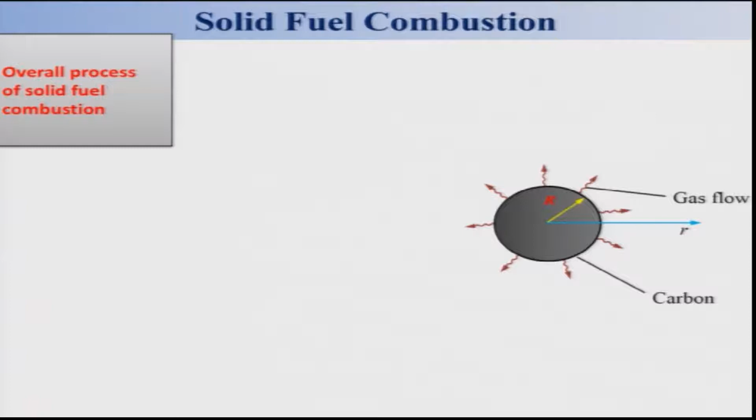And let us now look at a little bit more about it, and recall the overall processes of solid fuel combustion. If you recall, there is a solid fuel, carbon, we are considering. Now, we are considering non-pyrolyzing combustion, where the solid fuel is not undergoing any pyrolysis inside the solid fuel. Whatever is happening is on the surface, and the transport of oxygen is taking place, because this is your ambient. So, therefore, oxygen is getting transported toward the fuel from various regions. We have taken it as a solid carbon sphere, just to make life simpler. And therefore, the oxygen molecule will be transported towards the solid fuel.

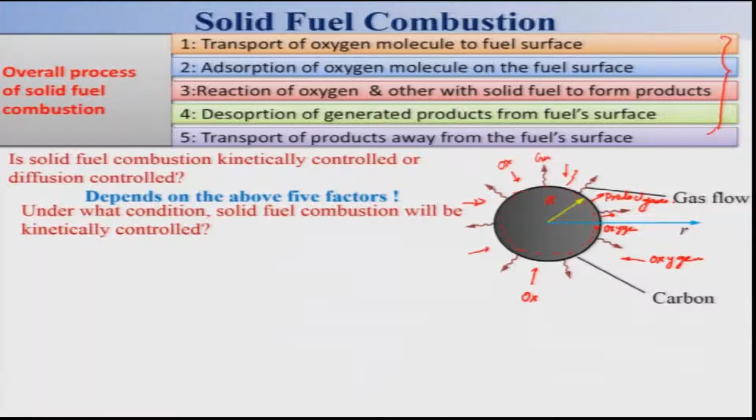But the question is whether solid fuel combustion will be kinetically controlled or diffusion controlled. It depends on the above 5 factors we have discussed, because these are the factors which tell us whether it is kinetically controlled or diffusionally controlled. In other words, solid fuel combustion will be kinetically controlled if the particle size is small and the gaseous flow around the particle is quite feeble, and another condition is that the solid particle temperature should be low. If the particle size is small, that means oxidizer and fuel already have more chance to come in contact, and the flow is really not much.

So, therefore, it is not affecting the solid surface. So, of course, the temperature should be low. So that gradient will not be much, and as a result, the reaction of oxygen and other gases like carbon monoxide with the solid fuel will be much slower as compared to the adsorption of oxygen molecules on the fuel surface and the desorption of generated products from the fuel surface.

That means this is a very fast process. The slower process is your reaction, therefore it is kinetically controlled. And why is it occurring? Because the particle size is small, the velocity around the particle is not much, and the particle temperature is quite small as compared to the other cases where diffusion-controlled combustion will be taking place. So, let us look at under what condition solid fuel combustion will be considered as diffusion controlled.

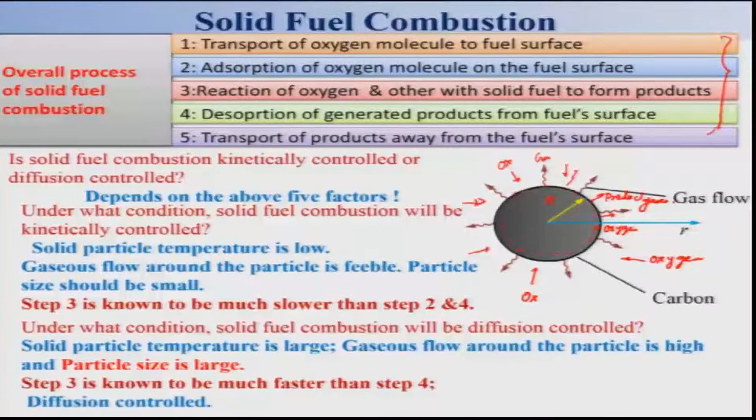So these are basically the slow processes, and they will dictate as compared to the reaction between the solid fuel and the oxygen and other products. So, therefore, under this condition, this kind of combustion is considered as diffusion controlled.

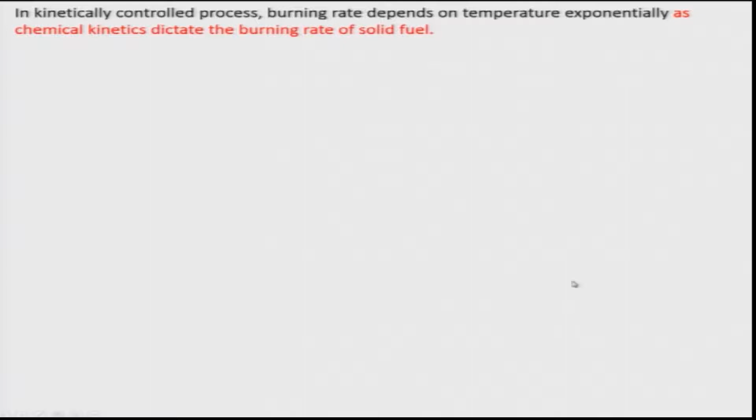So, in a kinetically controlled process, the burning rate depends on temperature exponentially, because the chemical kinetics dictate the burning rate of solid fuel. That is the governing factor controlling the burning of solid fuel, because the time required for chemical kinetics is much larger as compared to the transport of oxygen to the solid fuel.

And if you look, the burning rate changes drastically with temperature change, and this will occur only when the particle size is quite small and there is very little velocity around the particle surface. And keep in mind that in this kinetic control, if you consider this is your solid surface, I can say r/R is equal to 1, and this is your solid surface.

And in this condition, the temperature is a little higher, and it is changing along the radial direction, but the difference between the temperature at the solid surface and at infinity, far away from the surface, is not much. Similarly, the oxygen concentration for kinetic control at the solid surface is a little low as compared to away from the solid surface, but the difference is not much.

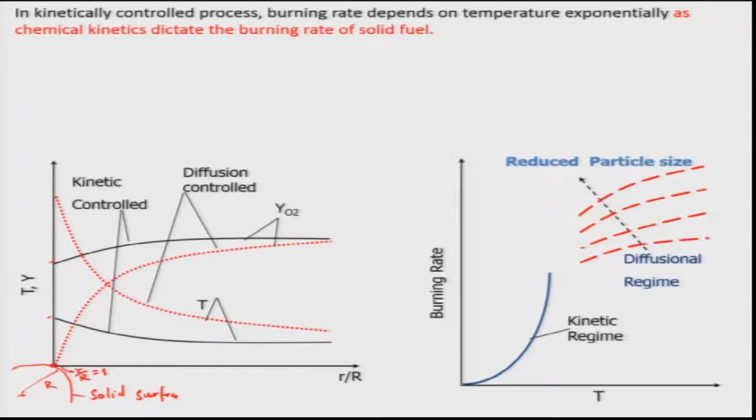In the kinetic regime, the burning rate does not depend on the particle size, because the particles are small and the temperature is not very high. So, therefore, it does not really depend on the particle size; rather, the burning rate depends on temperature exponentially. The diffusion process depends on the particle size and also the flow around it.

You can see that in what I have shown here, the burning rate is changing with respect to temperature, and also as the particle size gets reduced, the burning rate changes, or rather increases. And so, when the particle size is large, the burning rate is controlled by the oxygen diffusion rate to the particles. With the reduction in particle size, the burning rate increases, because more oxygen diffusion will be taking place.

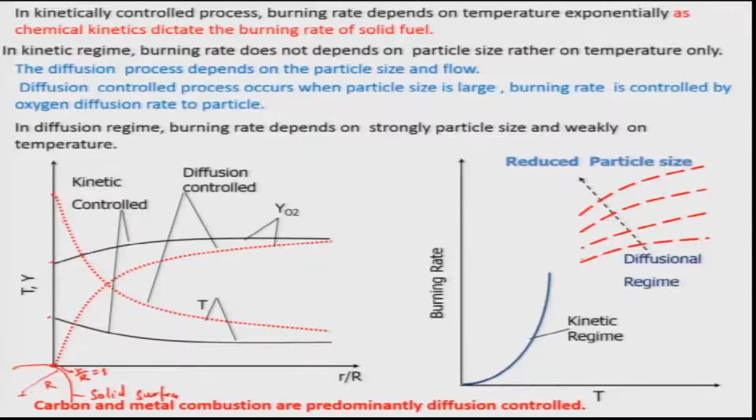So, therefore, you can see there is a drastic difference between kinetic control combustion of solid fuel and diffusion control combustion of solid fuel. Keep in mind that carbon and metal combustion are predominantly diffusion control. Unless the particle size is quite small, then maybe you can get a premix combustion, but which is very unlikely to occur. So, let us look at what really happens considering a particle.

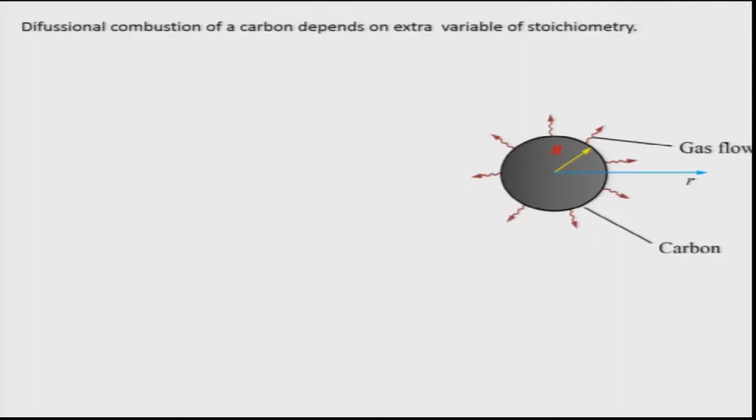Diffusion combustion of carbon depends on an extra variable, stoichiometry. Besides whatever we have discussed till now, there is another variable which plays a very important role, that is the fuel and oxygen ratio. At moderately high temperature, as we have seen, the diffusion control combustion of solid fuel occurs, and oxygen can diffuse to the carbon surface and react to produce carbon dioxide as per the following reaction: 1 mole of carbon reacting with 1 mole of oxygen giving carbon dioxide.

And if you look at the stoichiometry, the fuel oxygen ratio will be 12 by 32 for reaction 1, and as a result, carbon dioxide is formed here, it will be maximum here, and then it will be diffused to the atmosphere. As a result it will be decreasing, and this is r by R equal to 1, which corresponds to the fuel surface at this point.

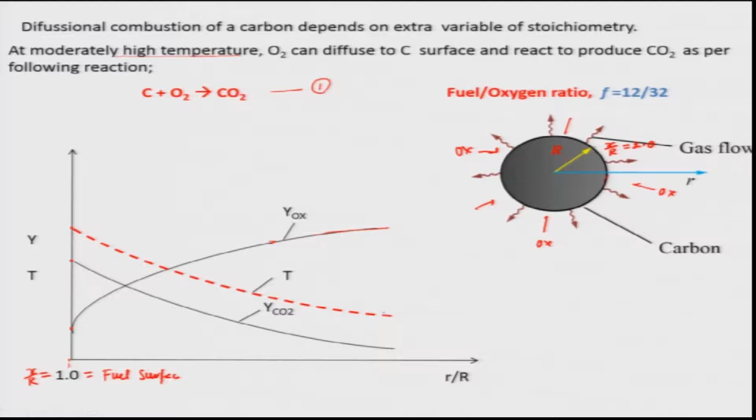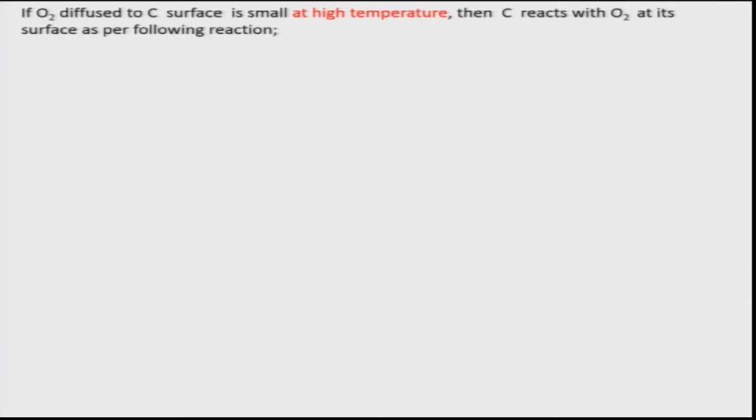So, if the amount of oxygen diffused to the surface is quite small and at a high temperature, then the carbon reacts with oxygen at its surface as per the following reaction. As I told, the amount of oxygen getting to this surface is quite small, and it is at high temperature. Then 2 moles of carbon will react with 1 mole of oxygen giving 2 moles of carbon monoxide.

And this is a different thing that happens. Instead of carbon dioxide being formed, as we had learned earlier, here carbon monoxide will be formed. That means at this surface carbon monoxide gas will be formed, and of course, the fuel oxygen ratio is 12 by 16.

And what people have found out, particularly Coffin, who conducted several experiments on the carbon sphere at high temperature, he found that negligible amounts of carbon dioxide and oxygen are present at the carbon surface, unlike what we had discussed earlier. His data shows that if Y is the mass fraction of carbon monoxide, the mass fraction of carbon monoxide decreases from the solid surface, r by R equal to 1, corresponding to the fuel surface, and becomes a very small value far away from the carbon sphere.

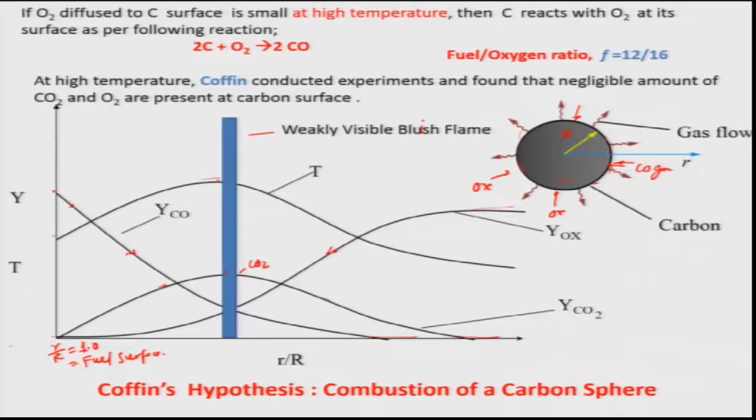Whenever it comes in contact with the solid surface it reacts with the carbon, and as a result carbon monoxide will be formed, and this carbon monoxide is again transported, and then the weakly visible bluish flame is formed in this region, a little away from the solid surface. And this hypothesis was confirmed by other researchers later on. So, this is the way the combustion takes place, and it is quite complex.

Now, we will have to look at the diffusional theory of a single carbon particle. We are not considering a pyrolyzing solid, rather a non-pyrolyzing solid fuel combustion, considering carbon, which is simpler to handle. So, we will take this carbon sphere, take this as the center, this is the r direction, and this is the radius of the carbon sphere. As I told earlier, oxygen will be diffusing into this from the ambient, which is under quiescent atmosphere conditions.

Keep in mind that we will be analyzing this making several assumptions. First of all, we will assume the burning process is quasi steady. That means the process is not changing with respect to time when you consider a small time duration. However, this carbon sphere gets consumed as its burning takes place. So, the actual process is not steady, it is unsteady, but we consider that for a certain time it is steady.

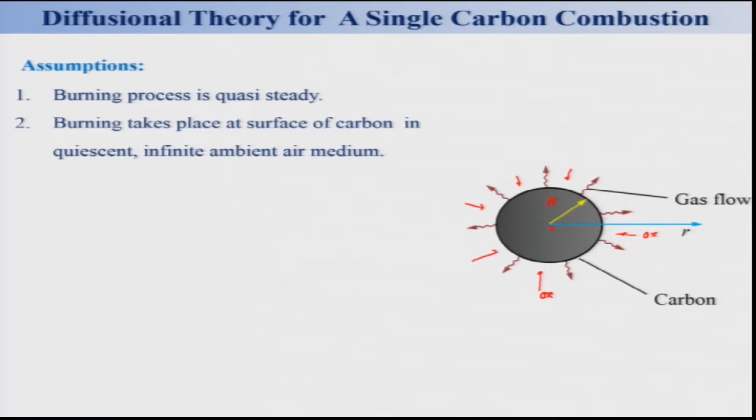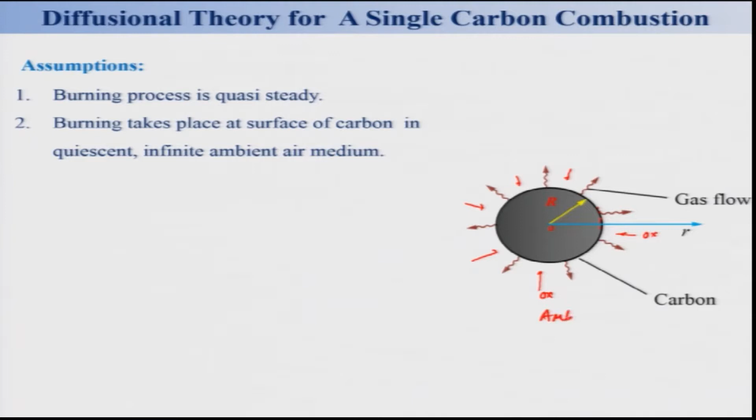And burning takes place at the surface of the carbon. As I told, it is a non-pyrolyzing solid fuel. So, the burning will take place at the surface of carbon in a quiescent and infinite ambient air containing oxygen. There is no motion, no velocity. There is no interaction with other particles; this is a single particle we are considering. But keep in mind that in an actual situation there will be a lot of interaction among the particles. Here we are just doing an analysis so that we understand what is happening.

There is no gravitational force acting. As a result, the effect of natural convection is ignored, which is not possible on the surface of earth, but in space or a controlled experiment it can be possible. It is done to simplify the analysis. Burning is diffusion controlled, as we discussed, and thermodynamic properties are constant. In an actual situation the properties of gases do change with temperature, so they cannot really be considered constant, but to make the analysis tractable we will use them as constant.

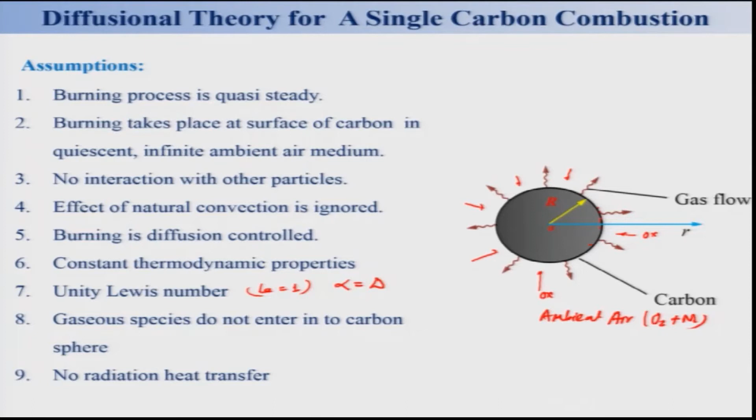And unity Lewis number, that means Le is equal to 1, to make the analysis simpler; that means thermal diffusivity alpha is equal to mass diffusivity. Gaseous species do not enter into the carbon sphere, as it is a non-pyrolyzing solid fuel, and no radiation heat transfer is taking place, so that the analysis will be simpler. And we will assume the gas to be ideal, therefore we will use the ideal gas law.

So, in the next lecture we will be discussing how to analyze this by invoking various governing equations. We will stop here and continue this analysis in the next lecture.